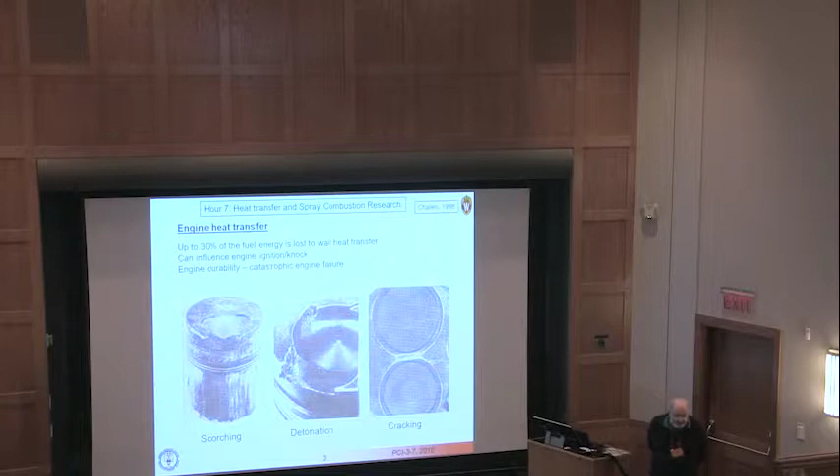Okay, so engine heat transfer. I've already mentioned heat transfer in the context of super knock in gasoline engines.

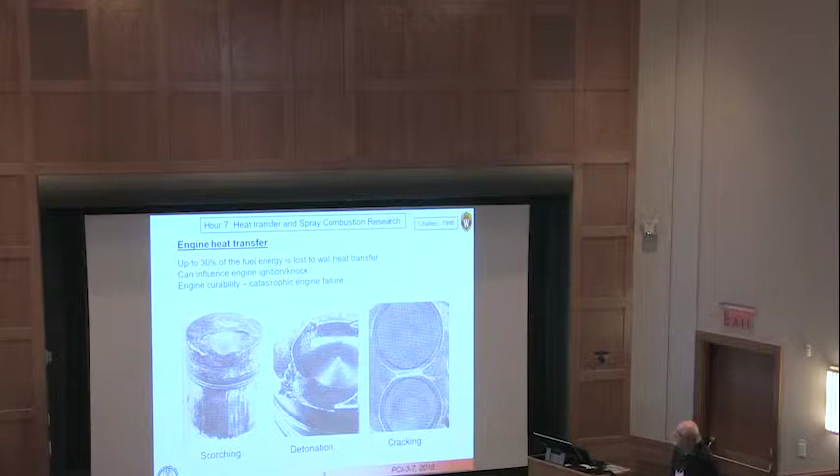Heat transfer is a big deal. About 30% of the fuel energy can be lost to wall heat transfer, and that number is approximate. There are ways of reducing that, and there are ways, obviously, of increasing that.

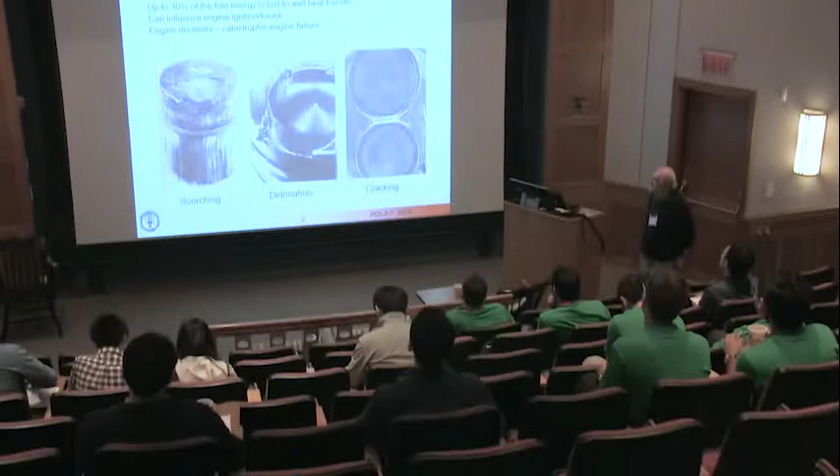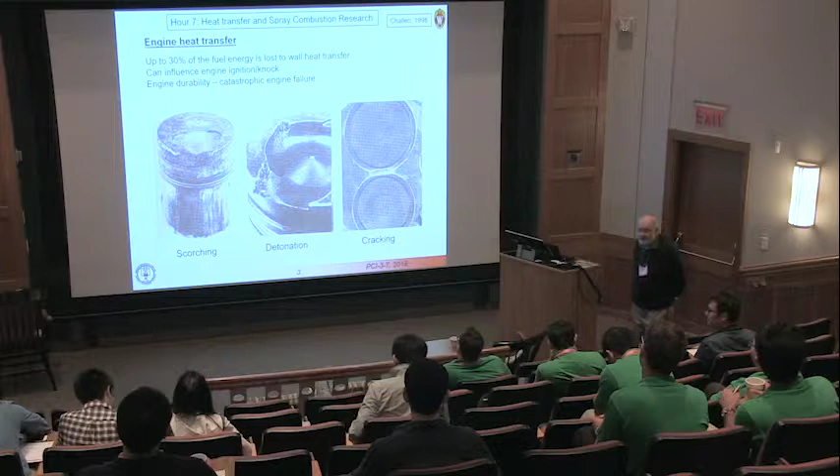The issue we saw yesterday is that heat transfer can also influence temperatures in the chamber, and therefore both ignition and knock. And it can obviously impact the durability of an engine and can lead to catastrophic engine failure, kind of like you see in these pictures.

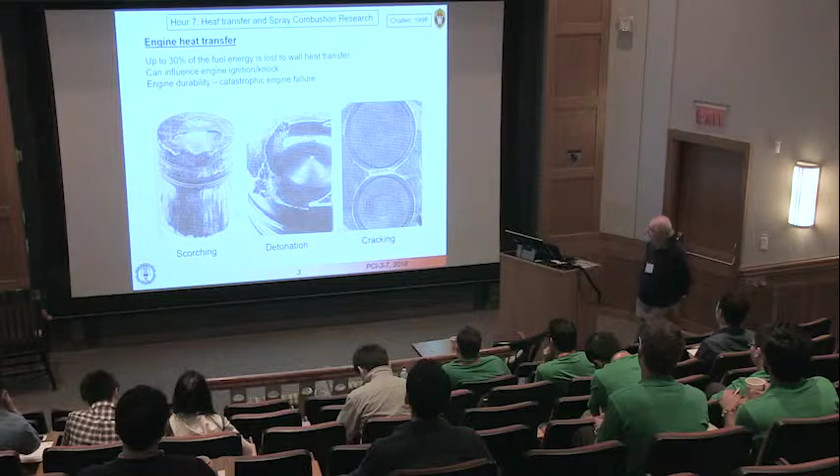You see here that in this particular case, parts of the piston were actually melting and burning away. In fact, some years ago, we had an engine in our lab where the student turned off the fueling, and the engine kept running, and eventually we found it was running on aluminum. Basically, the piston had melted and was supplying the fuel. So it can be disastrous.

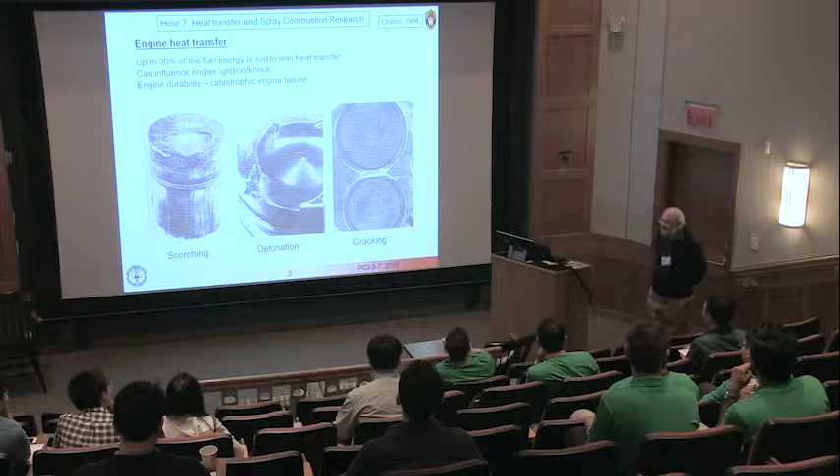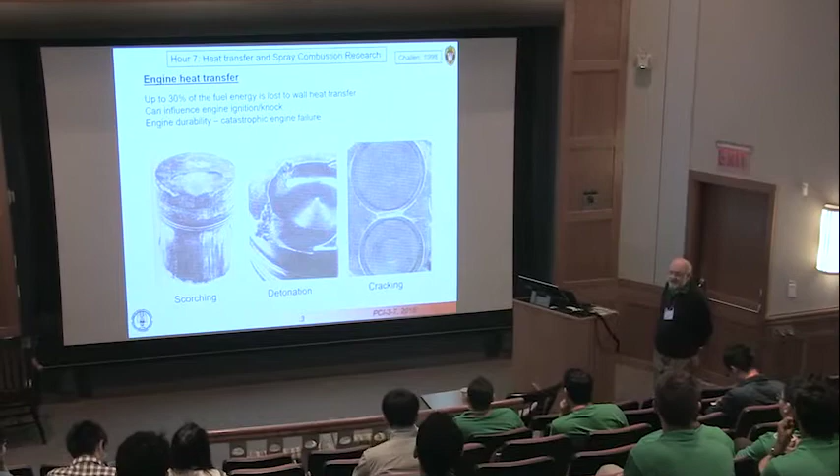And the other thing is little things can happen, like this little crack you see here due to thermal gradients, which can seriously impact the performance of an engine and its durability.

In particular, radiation is important because in the participating medium in the combustion chamber, radiation can either be absorbed or emitted and reach the walls, and that obviously impacts heat transfer as well.

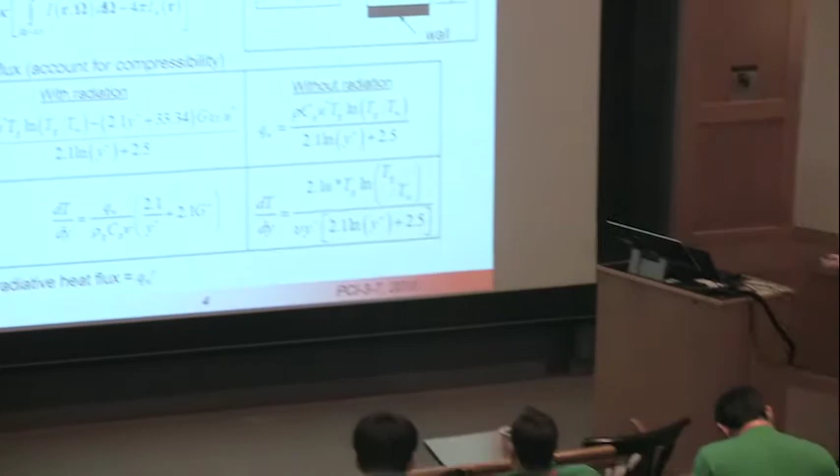So when you have radiation, you have to rethink this and realize that there are other source terms, like I showed you yesterday, that involve the combustion source term at the wall. You might have combustion going on, and radiation. So in the case of radiation, we want to include the radiative heat flux in the calculation of the wall heat flux.

Once, of course, we have the wall heat flux, we can calculate the gradient of temperature at the wall, which is obviously of interest. The radiative source term involves the radiation intensity at the position R in the direction omega. Omega is a solid angle, and the black body radiation, and then an absorption coefficient.

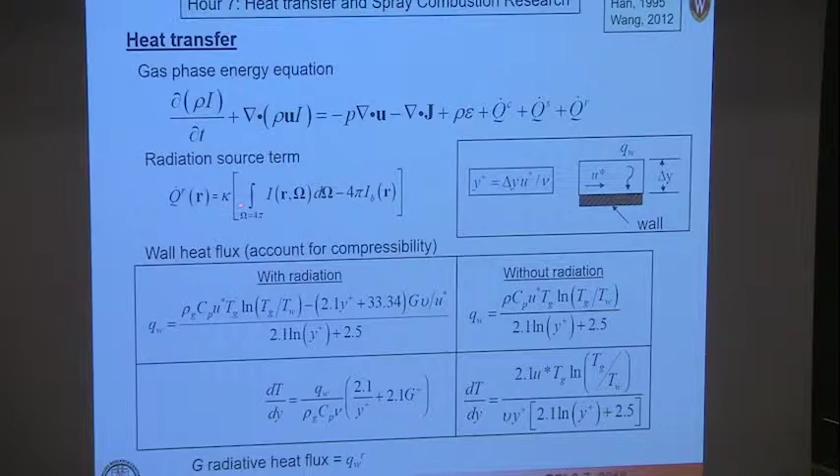So how do you get that? Well, we solve the radiation transfer equation, which is shown here. It looks a little similar to the energy equation, except that here we're talking about the radiation energy at the point R in the direction capital omega.

Remember, radiation travels at the speed of light, so you're not going to be looking at the same type of equation that you'd have for fluid mechanics. The terms on the right-hand side involve radiation transfer due to absorption and outscattering.

So here's your absorption term. This is a scattering term. Then there's the black body emission from each point in the domain. And then a term involving inscattering. So basically radiation arriving at a point is then scattered in various directions due to its participation with the media, the gases at the point of interest. And here's your scattering coefficient.

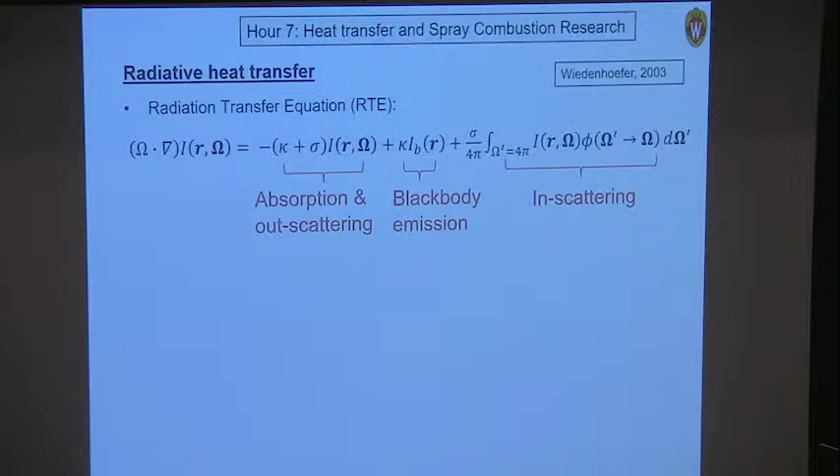So this is the equation that you have to solve. And typically in engine research, it's been shown that the scattering terms are relatively small, and we focus mostly on the absorption and black body emission terms.

The method that's used to solve the equation varies, depends on whose paper you read, but we've found that the discrete ordinates method is very useful. So what one does is, let's say you're interested in this point here, you collect radiation that comes from these 6 directions or surfaces, and then radiation passes out through those same surfaces.

And you do this for every computational cell in the domain. You basically resolve in the direction cosines, the first term here, the gradient of the intensity, with certain weights associated with the number of ordinates that you've chosen. In the example here, there's 6.

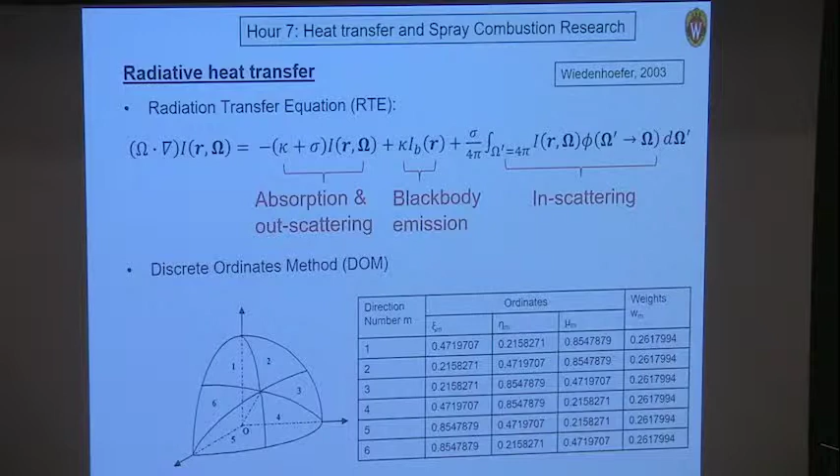So what about the absorption and radiation of soot, from soot and from the gases? The total absorption coefficient is the sum of the absorption due to soot and then absorption due to participating gas phase species, CO2, water, and others. For example, you might want to include CO as well.

This is the Beer-Lambert law, which says that the absorption in the gas is a function of temperature, pressure, and the path length of the radiation, and the emissivity term, which is contributed to by emissivity due to the fuel and all of the participating gases. So we need to look at each of those individually.

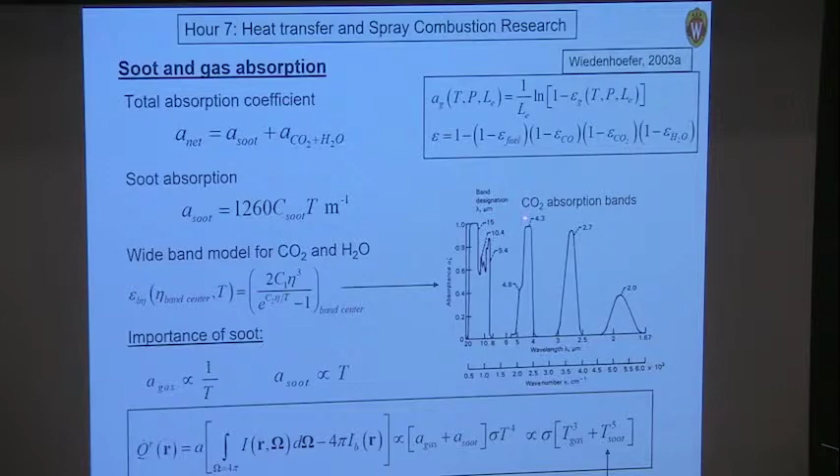Looking at soot absorption, the typical expression is that it's a constant times temperature. So it's relatively simple. But for the gases, since it's essentially continuum radiation for soot, the gases have typically absorption bands, like here you see for CO2 at certain wavelengths. You'll see absorption and emission of radiation.

The approach that we've often used is the so-called wide band models, where you represent these absorption bands with some kind of expression with constants chosen to match the spectroscopic data. Once you have that, you can plug that in and calculate the absorption coefficient due to that particular species. If you look at the equation, its dependence turns out to be more or less inverse with temperature for the gas phase, but proportional to temperature for the soot.

So if you go back to the radiative source term in the equation, just looking at the predominant absorption terms and ignoring the scattering terms, it's made up of the gas and soot contributions times T to the 4th for the radiation. Taking into account these dependencies, the gas contributes proportional to T cubed, and the soot contributes proportional to T to the 5th.

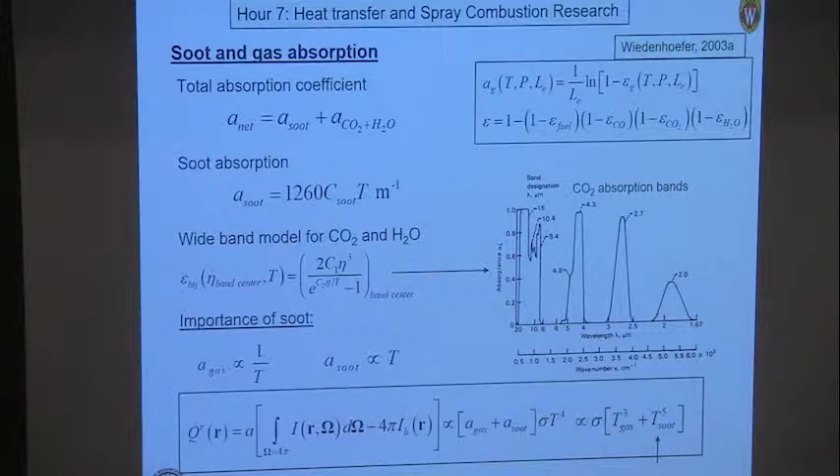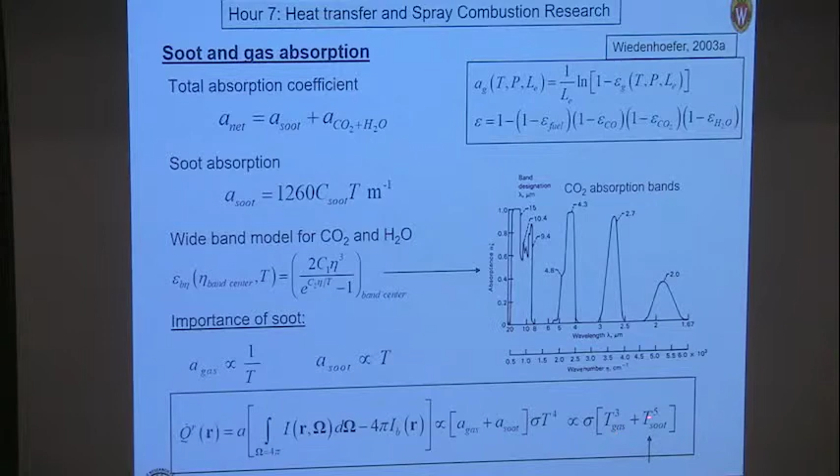That means that soot, if you have a lot of it, can be a significant contributor to radiative emission. That also depends on path length and various other parameters, pressure, temperature. So it turns out that in our experience for standard diesel combustion, this is often the predominant source, whereas for low temperature combustion, where there's not much soot, the gas radiation contribution dominates.

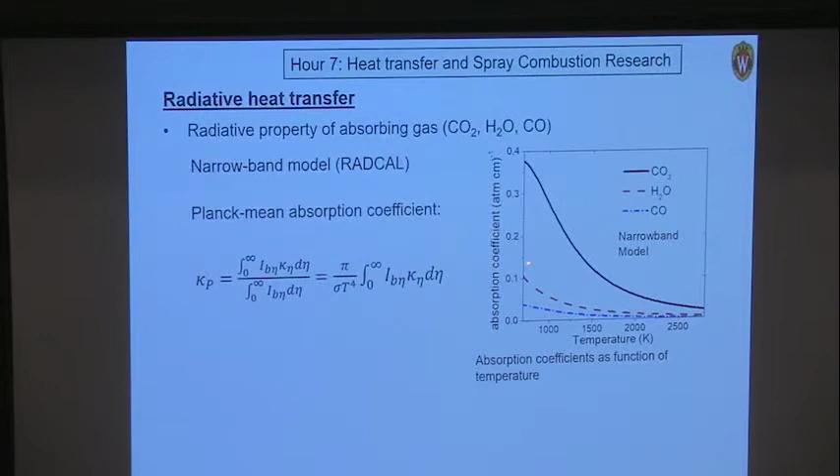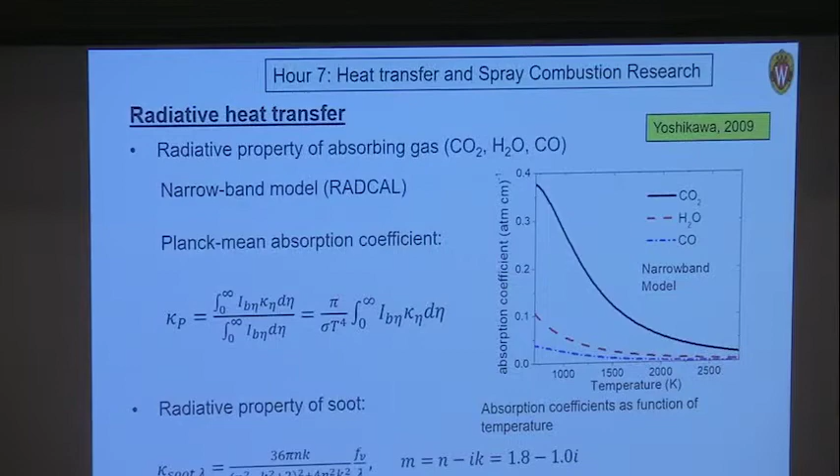So putting all of that together, one can form a sort of mean absorption coefficient that accounts for the gases, CO2, water, CO, and so on, as a function of temperature, and use this in our final evaluation of the absorption coefficient. That includes the gas and the soot.

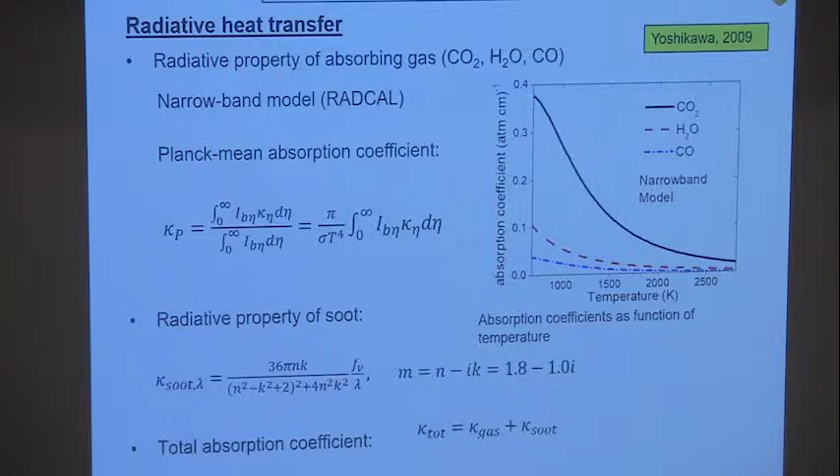The other thing that's important, now that we know the contribution due to convection, conduction, and radiation at the surfaces of our combustion chamber, is what is the actual temperature of the piston wall, the liner, and head, and so on. And that we calculate using a code that allows us to perform conjugate heat transfer analysis.

So here you see the mesh, say just for the piston. The boundary condition is from the gas phase. You might have some kind of combustion process. And this then contributes heat flux to the surfaces, both through radiation, convection, conduction. And then we solve for the corresponding heat conduction, taking into account boundary conditions such as the oil cooling jets below the piston, and so on.

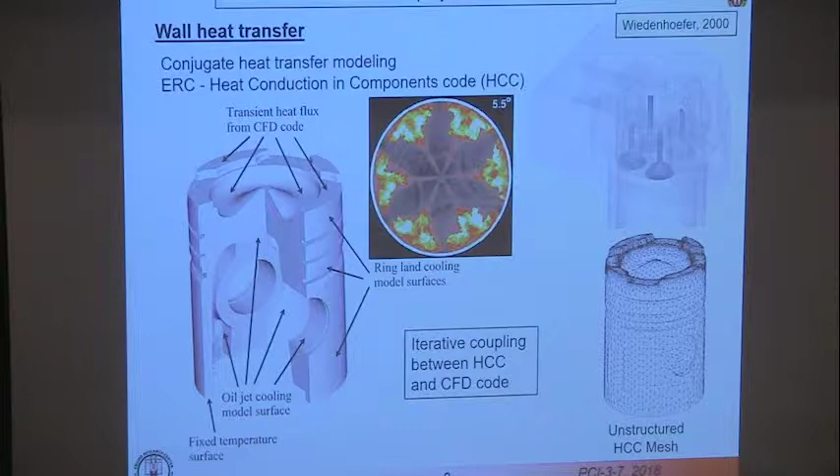So when you do the calculation, it turns out you have to do it as an iterative step. You use your gas phase code, like we use Kiva in this example, your CFD code, to provide heat flux, which is then input into the heat conduction in components conjugate heat transfer code, which then calculates the surface temperatures, which you had to assume back here. And now you have updated surface temperatures. You now recalculate the heat flux, and so on.

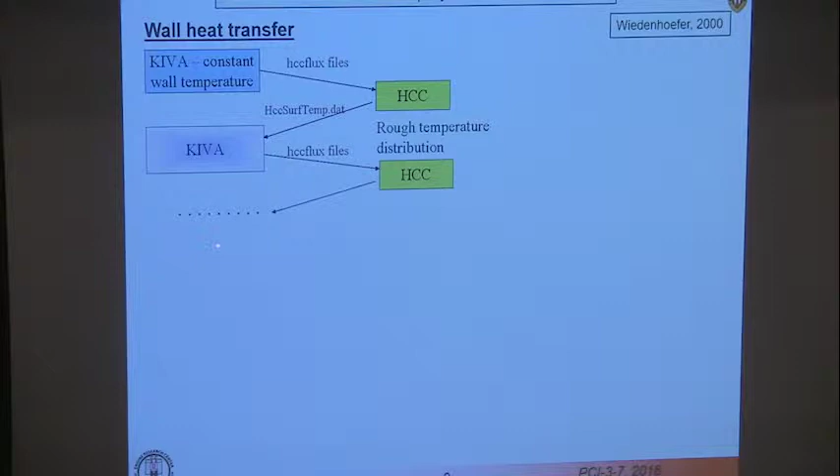It turns out that within 2 or 3 iterations, you can get the surface temperature of the combustion chamber pretty well analyzed. So here just shows an example of the calculated surface temperature on the piston after going through a couple of iterations.

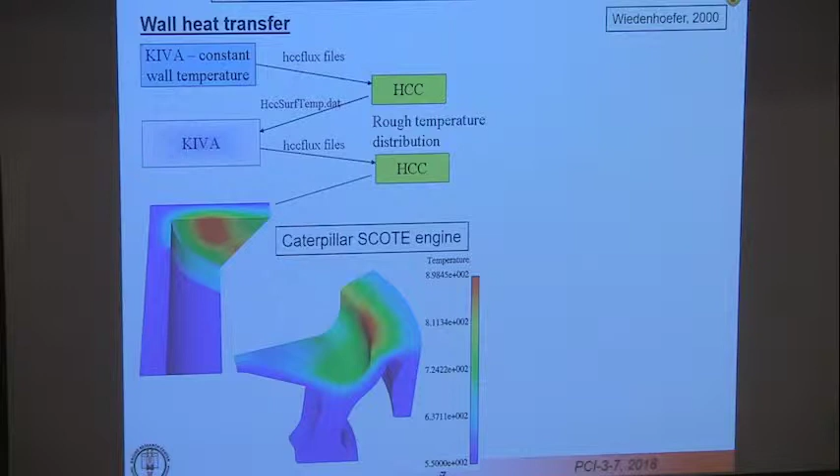You see down here it's cool—it's oil-cooled in the piston gallery regions. Then where the spray impinged and you have violent combustion, you'll see higher wall temperatures. This shows another engine with the same concentration of heat at the lip of the piston bowl, which is, by the way, where a lot of failures occur in these engines if you don't control the heat transfer paths in the piston.

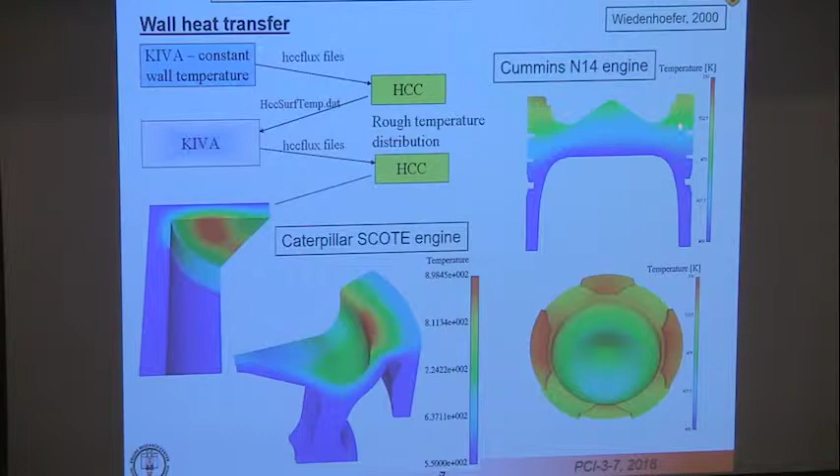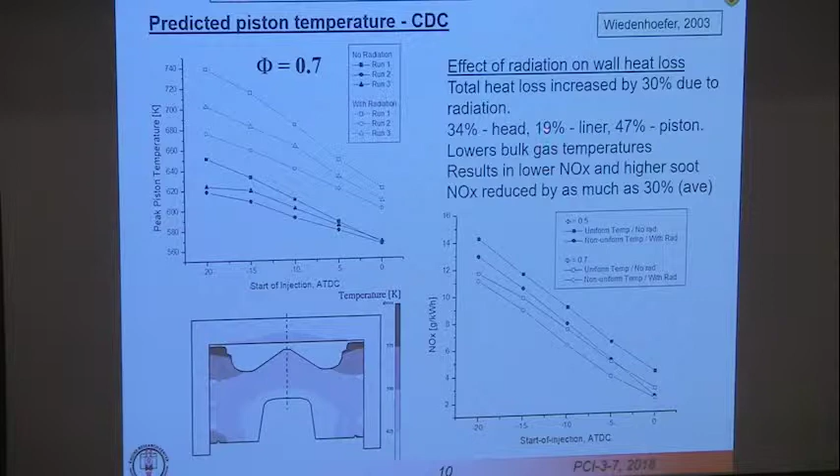So total heat loss is increased in this case by 30% due to radiation. Depending on where you are, the head increase was 34%, the liner 19%, and the piston 47%. So that energy that went into the wall actually lowers the bulk gas temperatures, which results in lower nitric oxide but higher soot, because with lower temperatures you generally form more soot.

So it's important to include these effects if you want to be predictive. Here we see, corresponding to this plot, the prediction of NOx. Obviously with early injection timing you have lots of time for formation of NOx, so you get high NOx levels. With radiation we get the black curves here. If we had ignored radiation—let's see if I got it the right way around.

These are with two different equivalence ratios, two different loads, so let's just pick one. The open symbols are the higher load case. The square here would be no radiation, and this with radiation. This is the reduction in NOx that you see due to the decrease in temperature. Depending on the equivalence ratio, you'll see more or less than that.

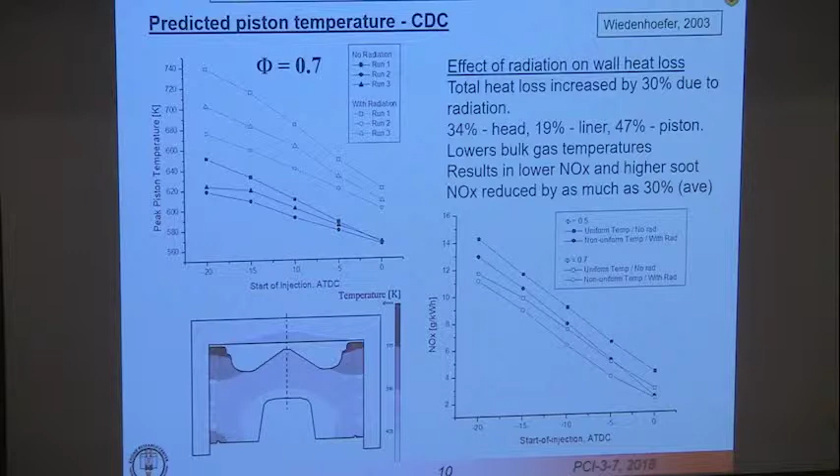So the bottom line is that heat transfer is important in engines, and later I'm going to show you some results with low temperature combustion engines where we try to minimize heat transfer and heat losses to the maximum extent, and this has an impact on combustion efficiencies.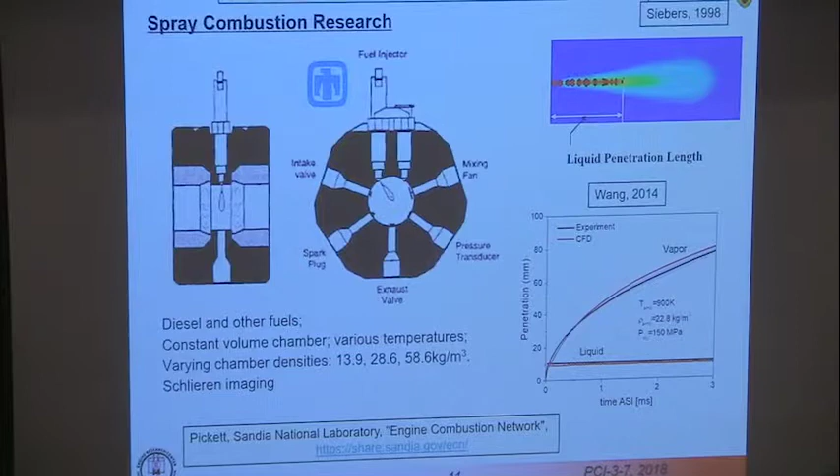You can see from the side view, here's the injector, here's the spray. If you view through these windows, you can see they have intake, spark, exhaust, pressure transducer, and a mixing fan to make sure that the conditions are more or less homogeneous in the chamber at the time of injection.

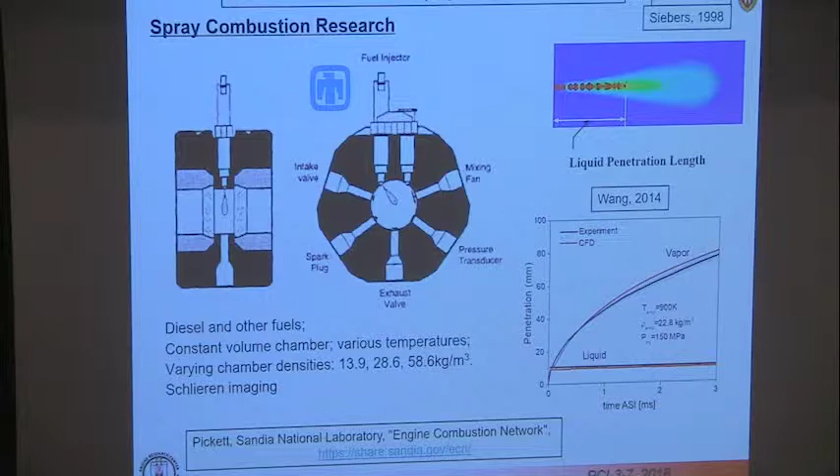This shows an example of some calculations we did of the injected spray. The penetration of the vapor versus time is shown here. The black is the experimental data, with some uncertainty shown in gray, and the red is the CFD. Then the liquid penetrates a certain distance, and that comparison with experiment is also quite good for this particular case. So that data is used widely.

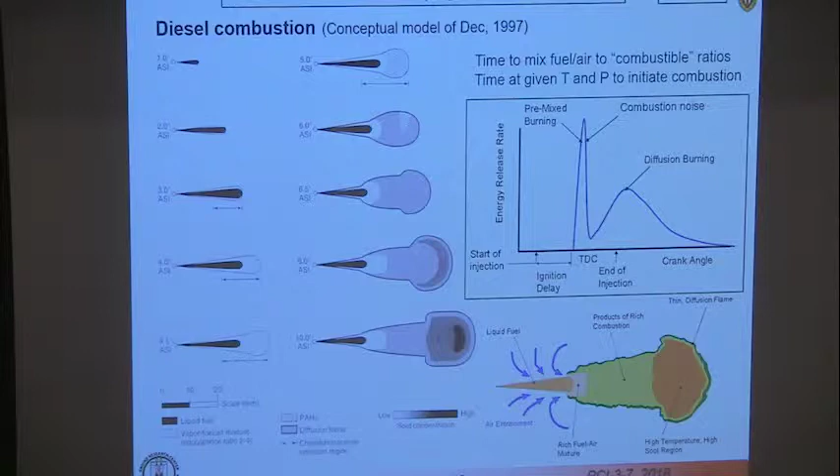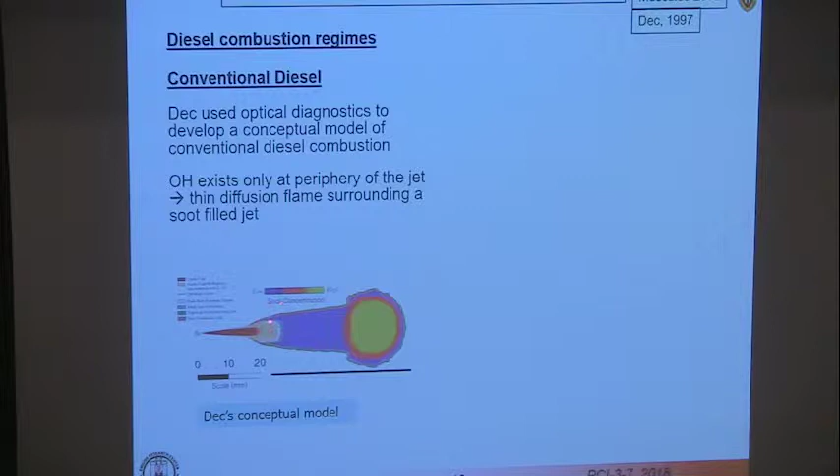That was what John deduced from his laser measurements in a diesel engine, using optical diagnostics. He concluded that if you looked at OH PLIF, for example, it only exists around the periphery of the jet, with a thin diffusion flame surrounding a jet filled with partially burnt fuel and soot.

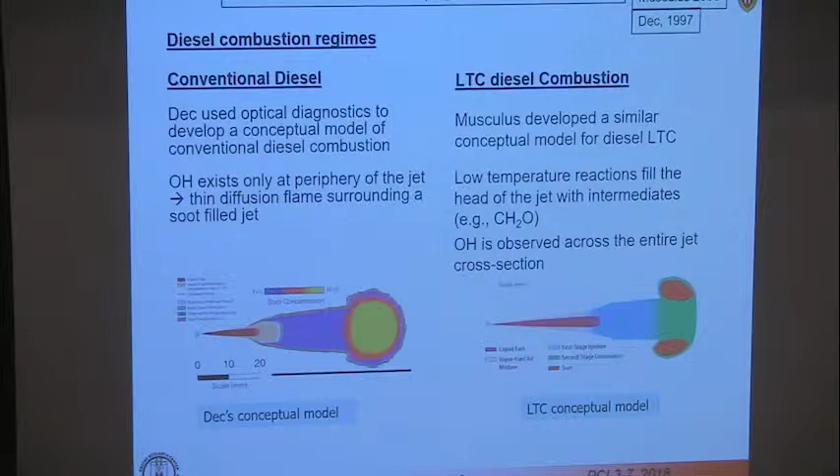Sometime later, in 2006, Mark Musculus extended this to look at low temperature combustion. Although there are some similarities—a liquid length and a vapor region surrounding it—he noticed a region similar to before but of much more extent, containing partially burnt or partially pyrolyzed fuel, such as formaldehyde and other first-stage ignition leading compounds. Eventually they undergo faster combustion in the second-stage combustion region. One thing he noticed was that OH was observed across the entire jet region, and there was much less soot than in the conventional case, with soot forming at the head of the jet—significant differences between conventional diesel and low temperature combustion.

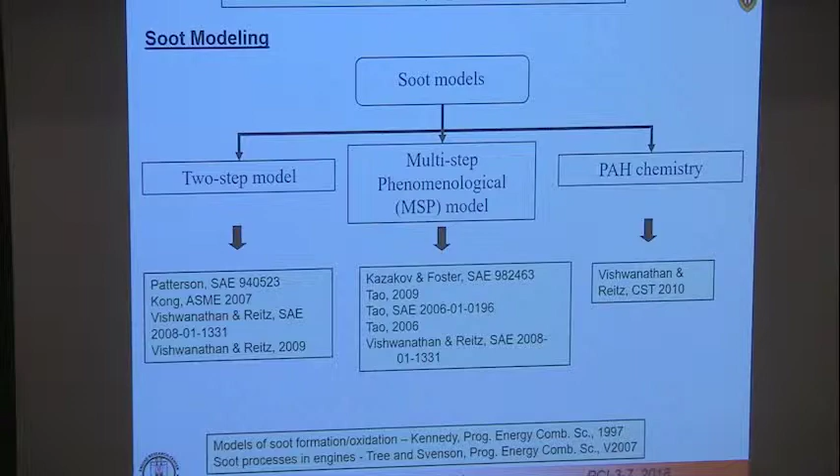Soot is, of course, of great interest to the diesel industry, and over the years there have been many attempts to model it. For instance, in my group early on we used the two-step model, followed by a multi-step phenomenological model, and then finally a more recent PAH model. There are other models you can read about in the literature—this is a vast field of research.

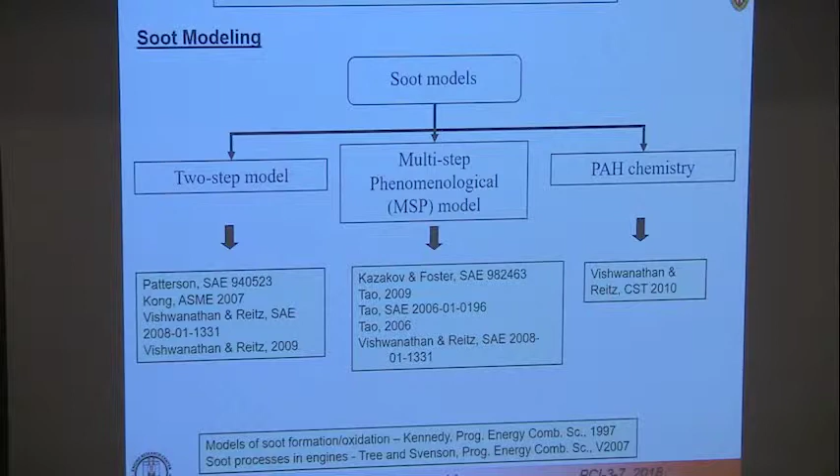Looking at the two-step model, proposed by Hiroyasu a long time ago in '76: the rate of change of soot mass due to combustion is the difference between a formation rate and an oxidation rate. The formation rate, found experimentally, was proportional to the square root of pressure, with an exponential dependence on temperature. In his case, the driving force was fuel mass, but we found it's better to use a species such as acetylene as the driving force, along with a tuning constant. That gives you the soot formation rate.

The soot oxidation rate—we've used the Nagle-Strickland-Constable oxidation rate, which is proportional to the soot mass and some sort of diameter of the soot density. Calculating soot isn't very arduous because it's a pretty simple model, and it's been used satisfactorily by a lot of people.

However, people have found certain aspects of the model don't agree well with experiment. For instance, when we compared soot mass as a function of distance from the injector against the Sandia spray chamber data, we found that experimental soot was occurring further downstream than in the calculation.

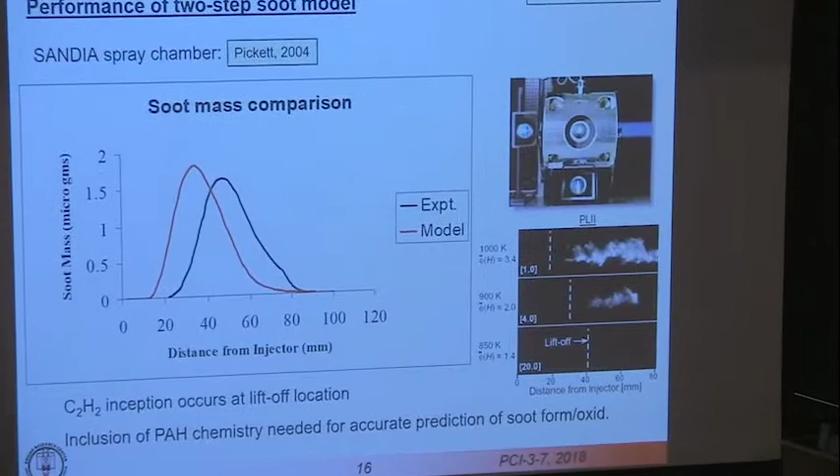Here are some measurements from the Sandia constant volume vessel, as a function of temperature. First, at low temperatures there's no soot. As temperature increases, you start to see natural luminosity indicating soot. The dashed line is the lifted flame location, and you see soot forms downstream of that. This was the first indicator that the two-step model probably wasn't giving us what we wanted.

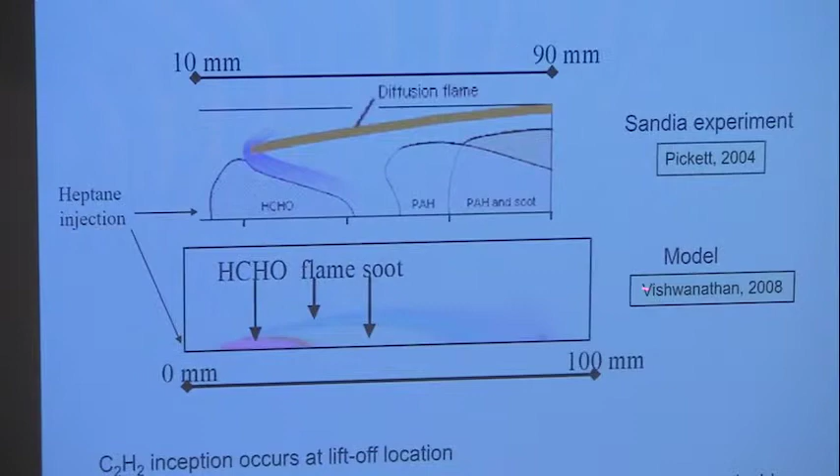So we started thinking about more complicated soot models. In particular, looking just at the gas phase chemistry, simulations showed that after the vaporization process and combustion starts, you see a region of formaldehyde—the precursor to first stage combustion—followed by a soot precursor region, with the whole thing surrounded by the flame. That agrees pretty well with the structure seen in Sandia experiments.

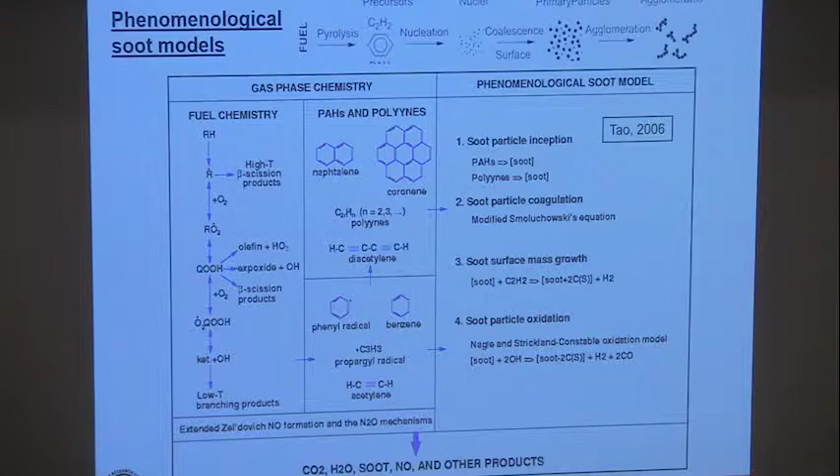That means one has to consider in more detail soot formation. So we start from the pyrolysis process, which we already saw when we were talking about hydrocarbon combustion.

This leads to formation of species such as acetylene, C2H2, which then with further oxidation or compacting of the molecule produces propargyl, which can combine to produce ring compounds. The ring compounds can eventually accumulate to form polyynes, which form the basis of the nucleation process leading to soot.

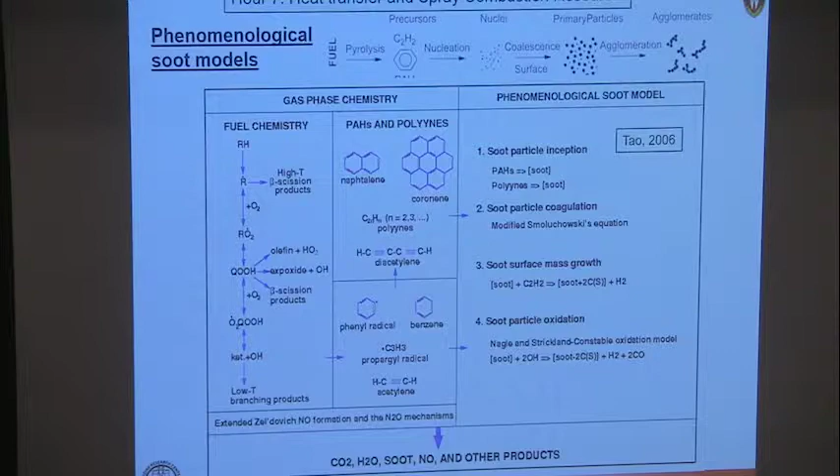The soot particles themselves can coalesce to form what are called primary particles, which can agglomerate to produce the final soot. All of this needs to be modeled if you want to predict the final engine-out soot. In the process of coalescence and agglomeration, you have a competing process of oxidation where the soot is also oxidized.

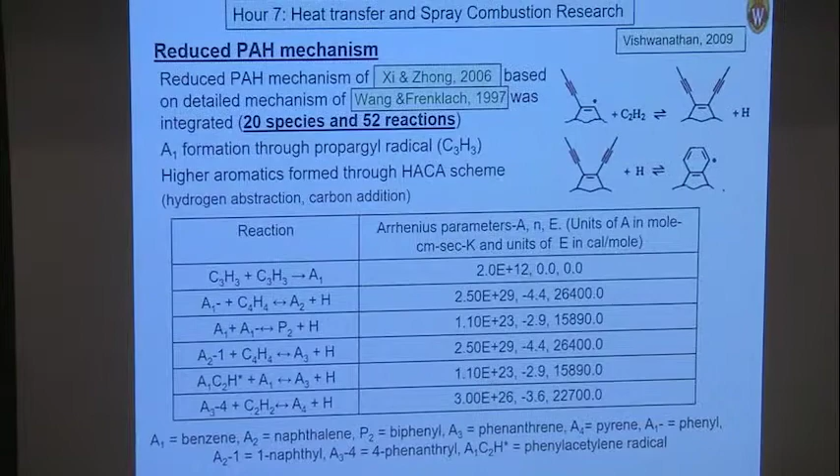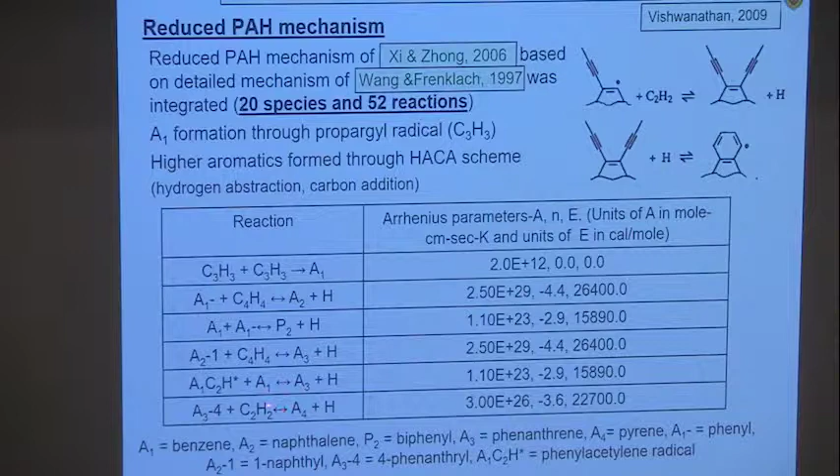So we looked in the literature for PAH mechanisms - starting from propargyl, the development of the first ring compound benzene, and the reactions that eventually lead to A3, which is phenanthrene, and then pyrene, A4. We extracted in Arrhenius form the appropriate constants for each of these steps. It turns out to be a 20 species, 52 reaction mechanism that helps predict the beginning PAHs that might start toward nucleation.

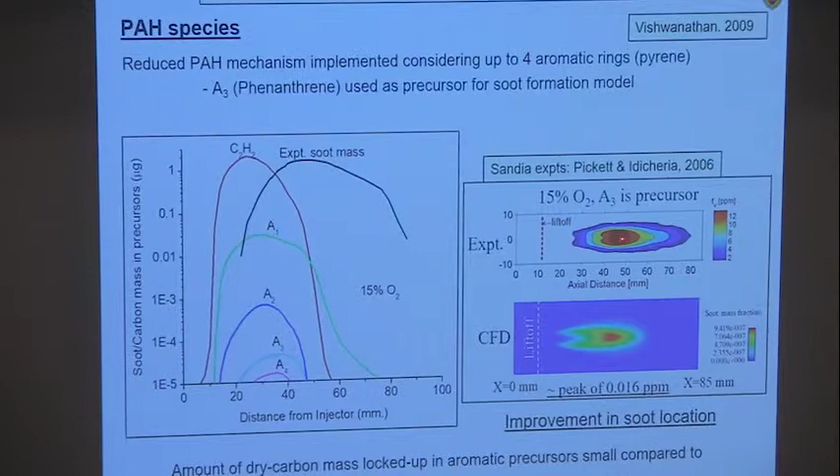So now going back to that experiment - this is on a log plot showing the soot mass. Notice there's a peak here: the soot is formed, then it's oxidized. The injector is back here, the lifted flame location is here, and here you see the soot volume fraction in parts per million. The CFD now gives fairly reasonable agreement with the measured data.

You can analyze in the CFD the species involved. The first species to appear is acetylene, then comes A1, A2, A3, A4. In this particular case, I think these calculations used A3 as the precursor in the Hiroyasu type model, instead of acetylene for the soot formation.

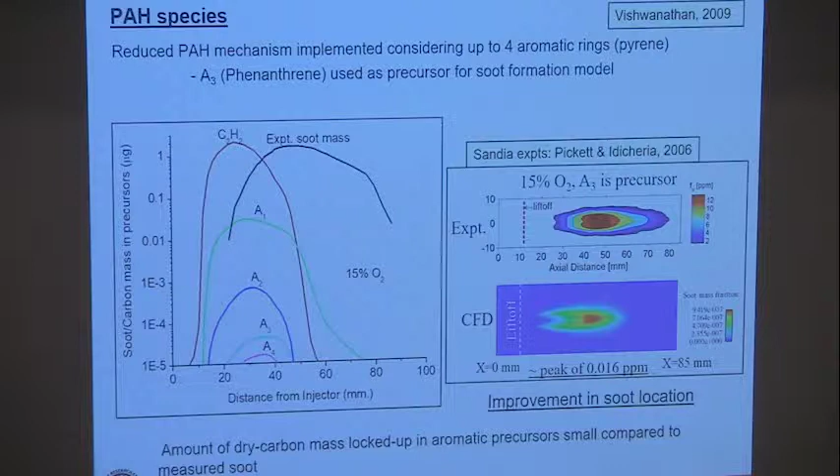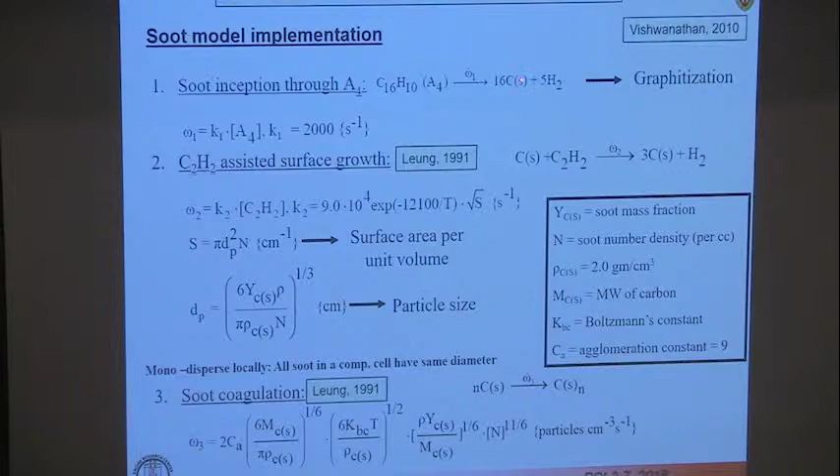So the actual model is nothing like the two-step Hiroyasu model. Here we start with A4, the pyrene, and we create carbonaceous soot through this graphitization reaction. The rates of these reactions again come from the literature.

Now we have acetylene-assisted surface growth, where the soot carbon, the solid carbon, through this HACA process - hydrogen abstraction, carbon addition - produces additional soot and hydrogen. These reactions depend on things like the surface area of the soot, which you have to estimate knowing the soot particle diameter and the number of soot particles.

Well, how do you get that? The soot particle diameter you know if you know the mass and the number of particles. So we solve, as I'll show you, a transport equation for the particle number.

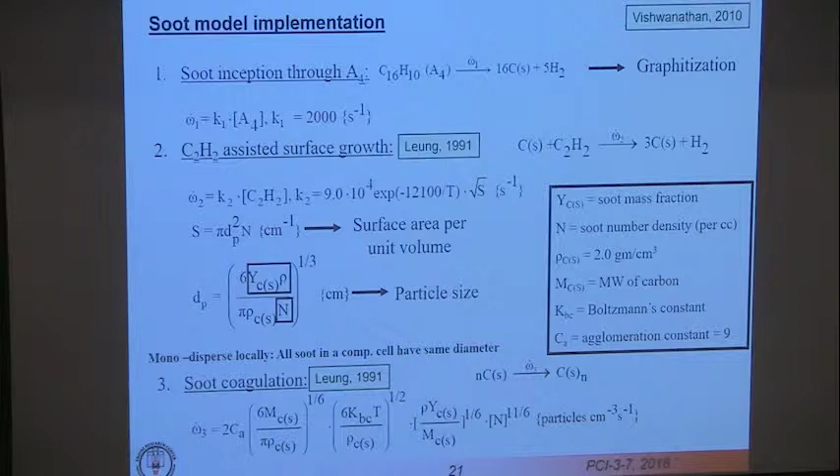Then of course there's additional processes such as the coagulation of soot as the nucleation particles grow. It also depends on the number of particles.

Then we have the oxidation processes. The oxidation due to oxygen, that's the Nagle-Strickland-Constable model - here are all the constants associated with that. And then OH-assisted oxidation, where soot can be oxidized by the presence of OH.

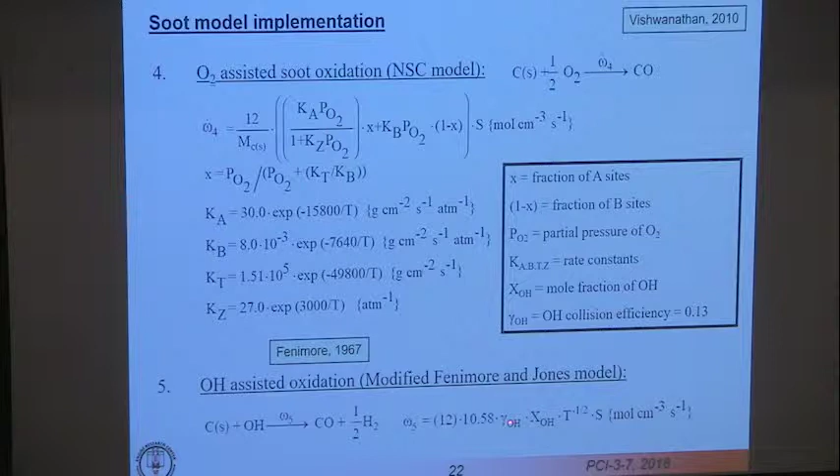Again, the temperature, the mole fraction of OH, and some parameters of the model, surface area - all of those things appear in the model. And then of course we have the PAH-assisted surface growth, similar to the acetylene surface growth, and many more parameters.

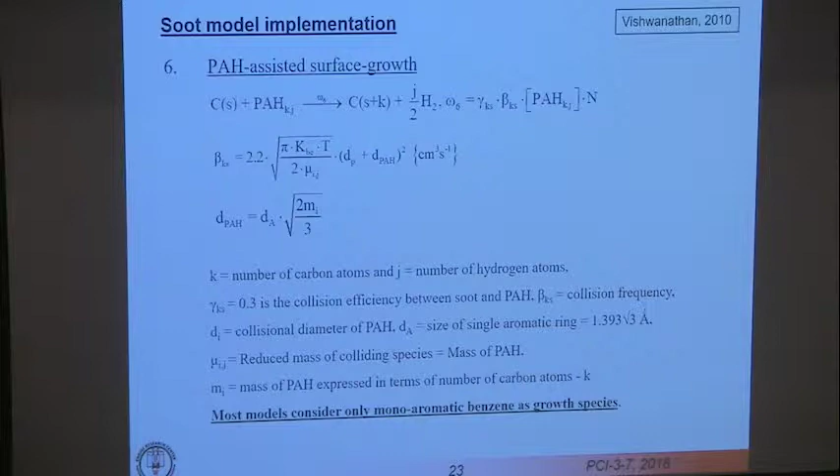Okay, so with all of that model input, we have now source terms in a transport equation written here. This transport equation is written in terms of, there's two of them: one for the soot species density, where M is rho times YC, the soot solid soot mass fraction, and another identical equation for the soot number density.

So this is what the equation looks like. We have a convective term, the diffusion term, the thermophoretic term. We had a question the other day about thermophoresis - that's included in the transport equation. And then source terms, and these source terms depend on whether you're dealing with the soot species density equation or the number density.

For the species density equation, those rates for the reactions that I showed you earlier are all going to contribute to the amount of soot that's in the chamber, contributing to the evolution of the soot mass fraction. And the number of particles is going to be determined from this equation, which includes the diameter of the particles and a nuclei size of the particle as a normalization.

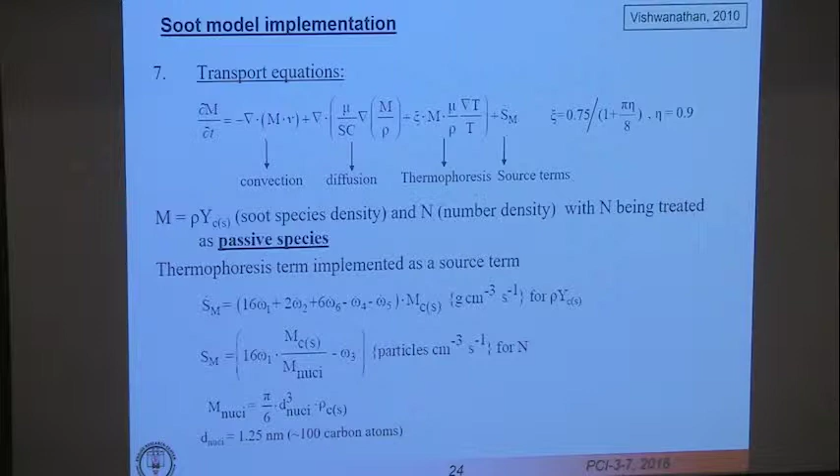So that's the soot model. Details are given by Gokul Vishwanathan's thesis work, and we found it to be quite useful, as I will show you.

So going to the engine combustion network sprays - since the early days there's been a lot more cases on the ECN website, and one of my students did some analysis for a wide variety of cases. I think I'll just talk about a couple of them: 900 Kelvin ambient at 15% oxygen - 21% would be air, right? So this is modeling a case with some exhaust gas recirculation.

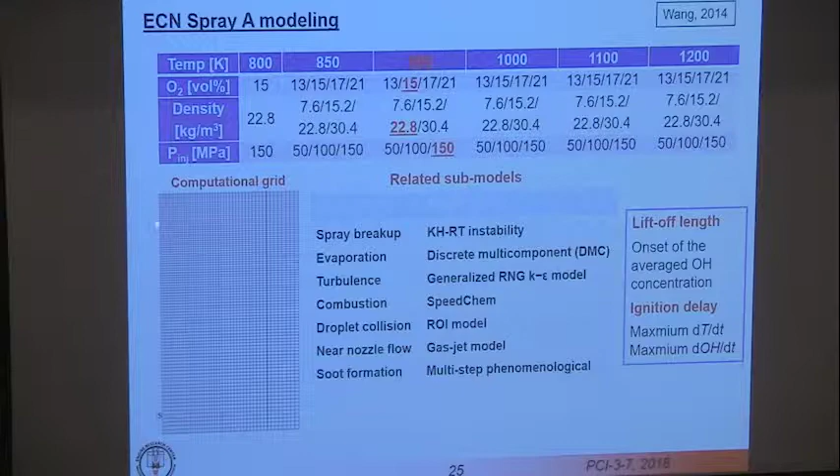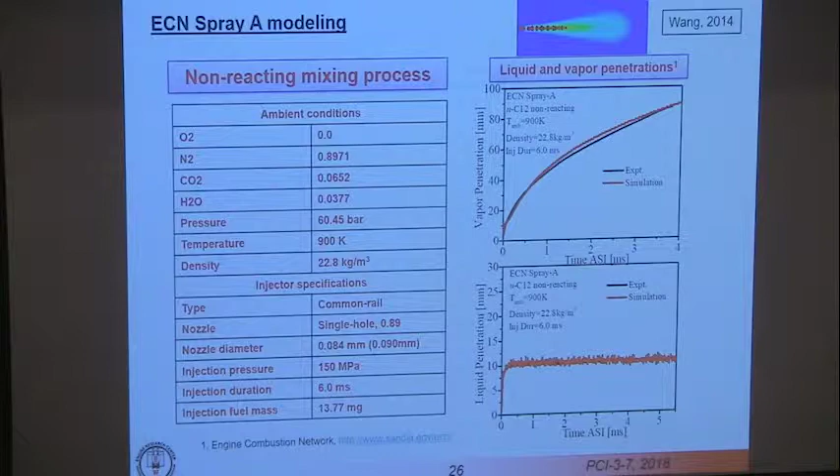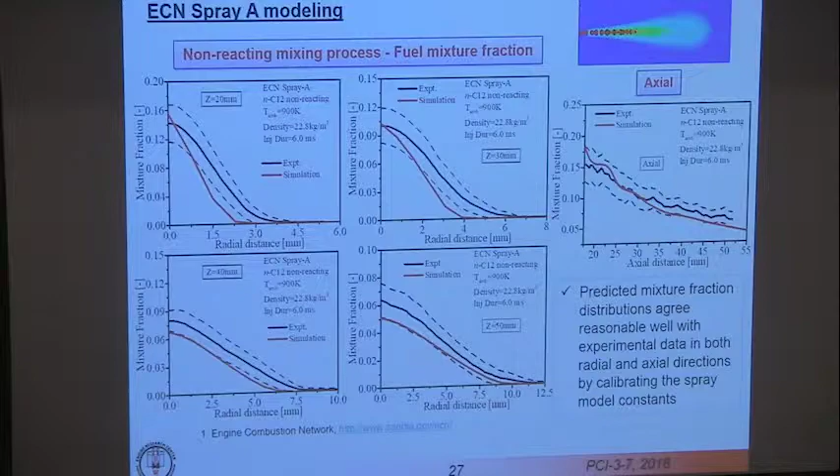These plots show the radial distribution across the jet of mixture fraction at 20, 30, 40, and 50 millimeters downstream, and also the axial profile of mixture fraction along the centerline. We do reasonably well with the axial profile, but there are some discrepancies with the radial profiles. This is influenced by the turbulence model, and I'll show results later that show improvements over these, but these are still within the experimental scatter, the dashed lines in most cases. So now you've got the appropriate fuel distribution before combustion.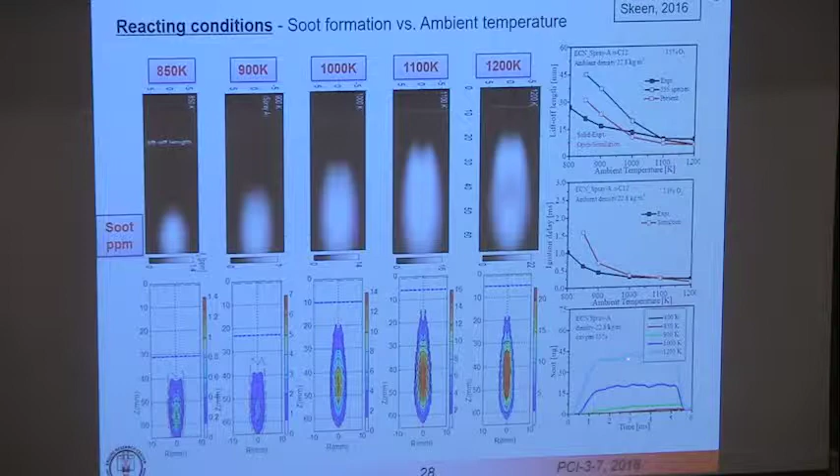We can use the model to explore details like the surface growth rate. How important is this reaction? How important is soot particle coagulation? We can change these constants in the rates to see what happens. If we look at our baseline and play with the coagulation constant, dividing by 3, and the surface growth by multiplying by 1.5, we see that surface growth has much more of an effect than coagulation. This is useful because it tells you where to look to improve your understanding or the modeling.

You can see the corresponding changes in the distribution from the baseline with these changes. The other thing these changes do is change the predicted diameter of the particles, which has quite a significant effect, as you can see from the changes in color here. So if you're doing a simulation and find that your predicted particle diameters aren't to your liking, you might need to tweak some of these model constants.

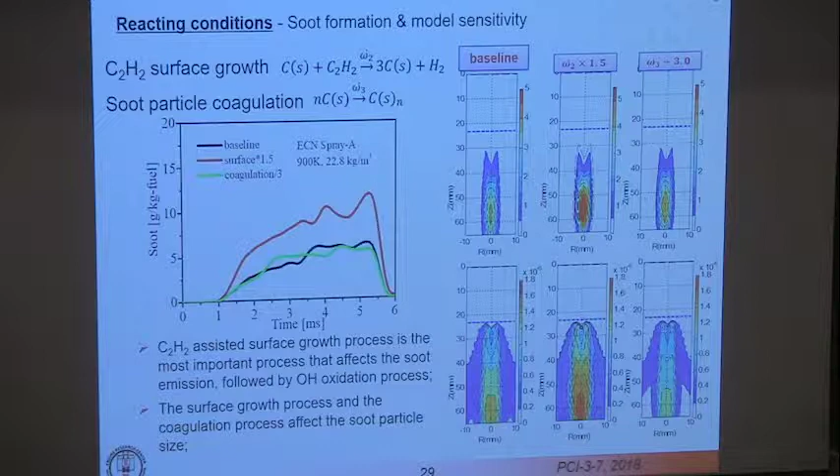What I wanted to talk about here is how heat transfer and spray combustion research ties into CFD modeling development. There's a lot more work needed. We've just discussed how you can go from the gas phase chemistry to the inception of nuclei, which then lead to the formation of particles. We have assisted surface growth. Also, the aromatics contribute to the growth of the soot particles, which then can coagulate, producing finally the particles, and they can agglomerate and so on. Meanwhile, all of this process is being subjected to oxidation by O2 and OH.

We have extended the model also to gasoline direct injection engines. One of the things we had to consider there was pyrolysis of the fuel, the heavy components in the fuel. There are some papers that describe that.

The other direction for research highlighted by these pictures is that soot is not just carbon. Conventional diesel has a high fraction of elemental carbon, but if you look at advanced combustion regimes like partially premixed compression ignition or reactivity-controlled dual-fuel compression ignition, what you collect on a filter is a completely different color.

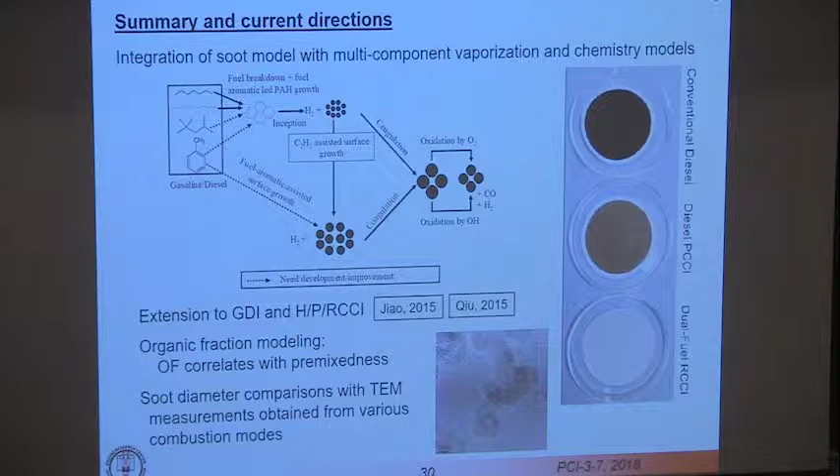That's something that really needs more study. We've done a little bit of work in that area in some of the references you see here. So these are the references I wanted to cover today in this first section.

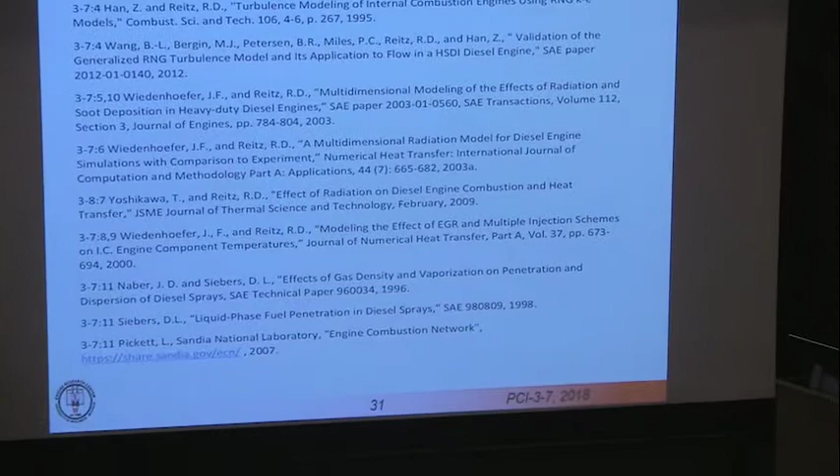We have 20 minutes, and I was thinking it would be nice if we just went around the room, and maybe you could take 30 seconds to talk about what you do, so everyone knows who you are and what you've been doing, and maybe that will help us see the connection between your presence in this room and what I've been talking about. If you don't want to talk, I'll just ignore you.

The same one, why don't you tell us what you... Okay, so my name is Fahd Zahani. I'm a PhD student at University of Michigan, Ann Arbor. I'm actually, basically, soot is my field. I'm trying to quantify soot formation from GDI engines as well.

I'm focusing more on the role of deposits in the engine, specifically on the injector. Injector fouling was found to be affecting engine-out emissions, engine-out soot. Under conditions where we have no wetting of the other surfaces, injector wetting is actually the dominant soot formation mechanism. I'm trying to understand that role and how the deposit building up on the injector affects the PM we see. As the deposit goes up the tip, soot changes. Okay, thank you, I'm going to move on, but that's really good.

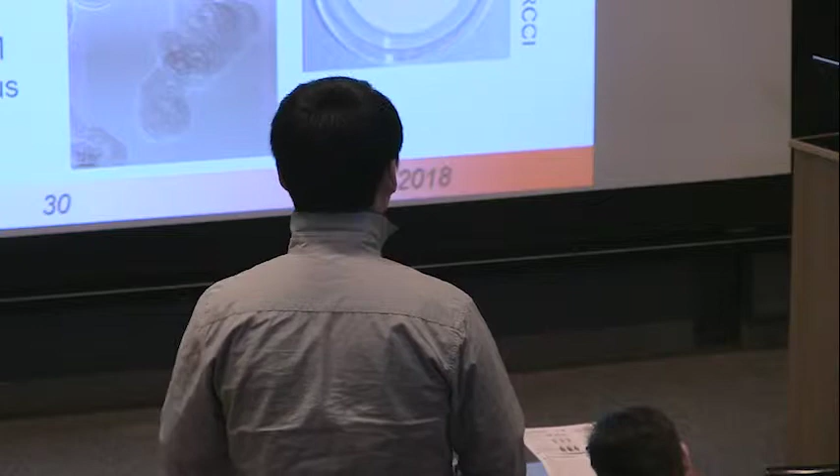Hello everyone, I'm a visiting scholar at Princeton University. My major is internal combustion engine. My research is about methanol and ethanol alternative engines.

Very good, are you working with Xinguang? I'm working in China, but here at Princeton as a visiting scholar. Visiting scholar. Yeah, Princeton. Good.

Hello everyone, my name is Soya. I'm a postdoc at Princeton working with Professor Michael Mueller. My field is also soot. We investigate several different aspects. The first is fundamental soot modeling.

Typically people have method-of-moments and sectional methods. One is pretty cheap, the other can give you the distribution, but it's pretty expensive. So we are developing a hybrid one between these two to provide good performance.

The other thing we're working on is large eddy simulation of soot flames. The key problem is when you have a large grid that doesn't resolve everything, the average mixture fraction cannot represent the mixture fraction inside the grid itself. So in most cases you significantly under-predict the soot, and we figured out subgrid modeling to address that.

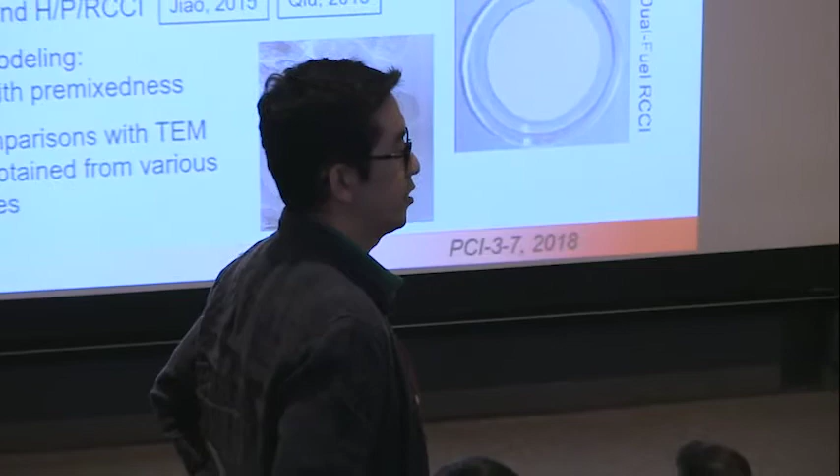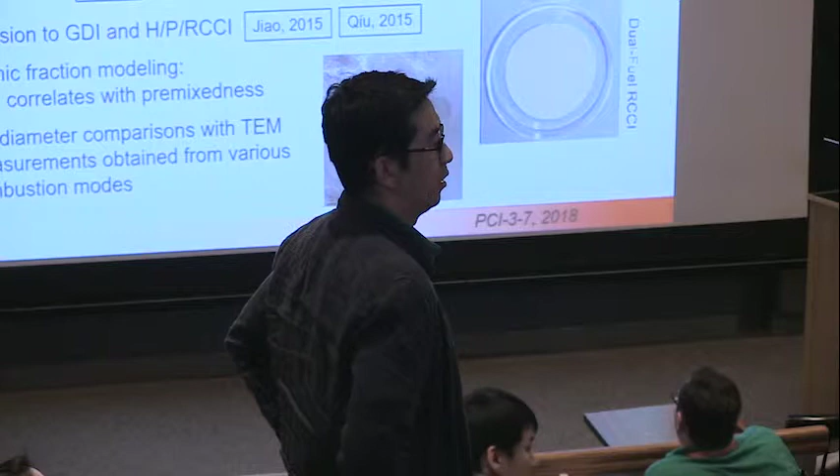Hi, my name is Kwang Hee. I'm a PhD student at the University of Michigan. Now I'm working on the experimental study of auto-ignition of several gasoline compression ignition fuels using a variable compression ratio HCCI setup.

Hi, my name is Dick Berger. I'm studying engine physics at ECN, and I'm a new PhD student, so I'm not really sure about the topic yet, but I'm interested in diesel engine combustion and diesel engine experiments.

You're in the right place.

Hello everyone, I'm Abdullah Bajwa. I work in the same lab, and we are currently working on coming up with new ways to estimate trapped fraction for large bore natural gas two-stroke engines. We work with Dr. Mark Harrison from GE, who is one of your former students.

Hi, I'm Carrie Clemmer. I'm at Princeton, and I'm looking at uncertainty propagation in turbulent combustion models. I'm Cody Nuna, I work in Michael Mueller's group at Princeton University on reduced order chemistry models for large eddy simulation, and specifically how radiation in those kinds of systems interacts with the chemistry.

Hello everyone, my name is Matt Montgomery. I work with Lisa Pfefferle and Charles McEnally at Yale University, and we study how chemical structure influences soot formation in laminar flow diffusion flames.

Hi, I'm Ferris. I'm from KAUST, and I work with Professor Robert Dibble. I'm working on the argon engine, which is an advanced technology - you replace the nitrogen with argon because of its high specific heat ratio, and everybody can now see why that's a good idea, right? Yes.

My name is Carlos Romero. I work for the Universidad Tecnológica de Pereira in Colombia. I teach internal combustion engines and also mechanical design. I love internal combustion engines, but from my background I've studied it from the point of view of mechanical systems, trying to design parts of the engines. Lately I've tried to get an insight into the combustion phenomenon, which is very important to me. Now we are working with a small engine, trying to assess engine performance, varying the compression ratio and the ethanol content mixture.